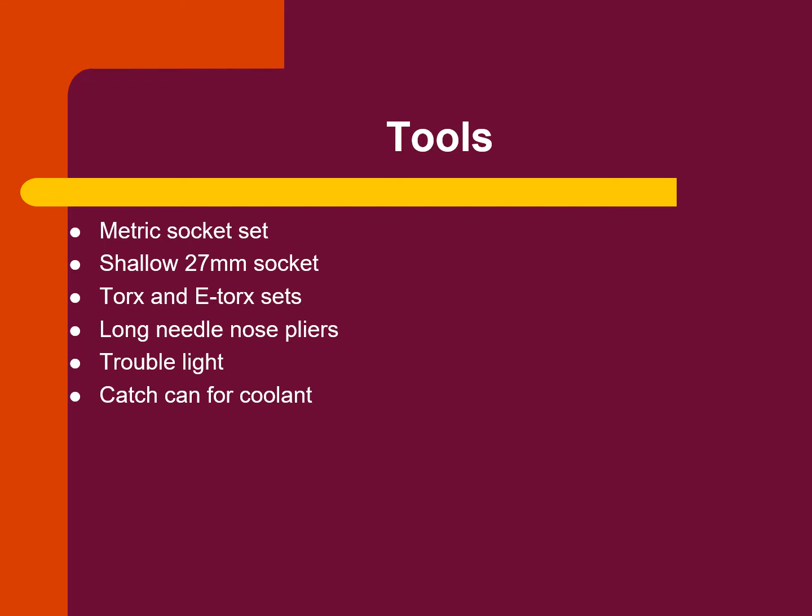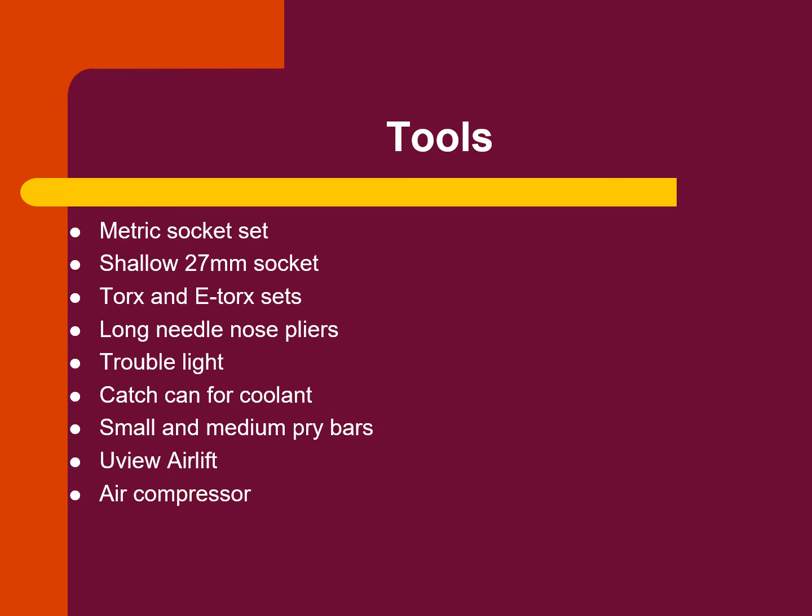In terms of tools, for this project, I used a metric socket set, a shallow 27mm socket for turning over the engine via the crank pulley bolt, Torx and E-Torx socket sets, long needle nose pliers, a trouble light, a catch can for the coolant, and if you happen to have an unused kiddie pool handy, that would be a good idea, small and medium-sized pry bars, a UView Airlift tool, which is for refilling coolant, an air compressor, and an air regulator for use with the UView Airlift,

hose clamp pliers or water pump pliers, torque wrenches, a flathead screwdriver, a 30mm box end wrench, a blowgun, a small punch, and I have a Max Jacks which I use to lift the car, but if you don't have access to a lift, then a jack and jack stands to get the car in the air, and a pipe to use as an extension for leverage when manually turning over the engine.

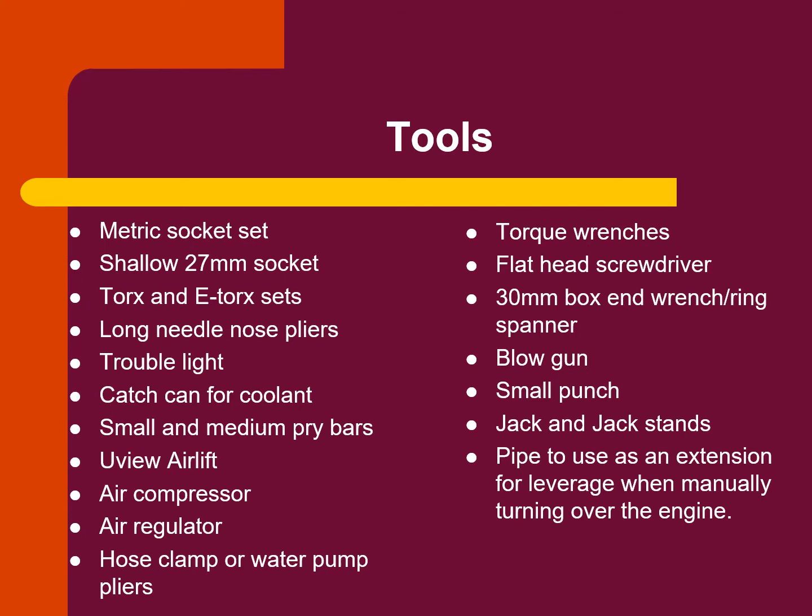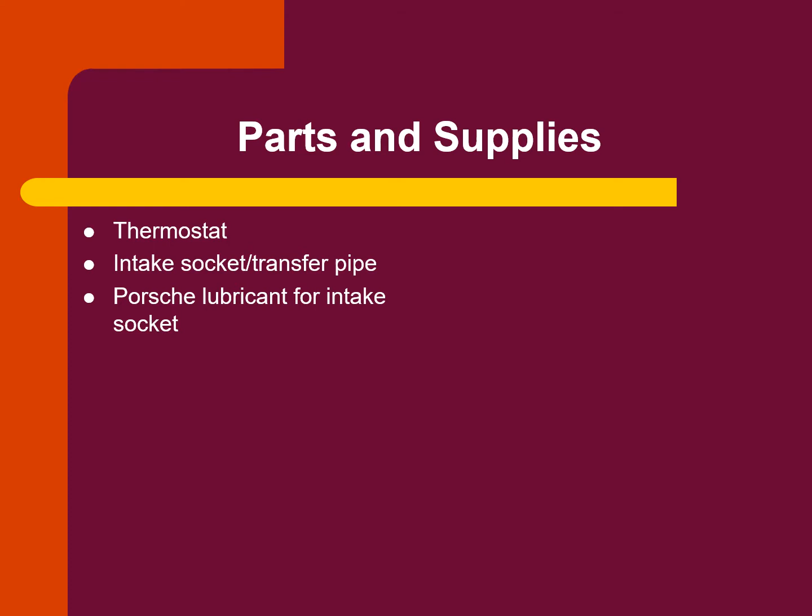I'm going to list parts and supplies that I used for this project, but I'm not going to explain what they were for because that will become apparent as we go through the procedure. So we will need a new thermostat, an intake socket or transfer pipe for the thermostat, and the special Porsche lubricant for that intake socket, 2 gallons of Porsche coolant as well as 2 gallons of distilled water, acetone,

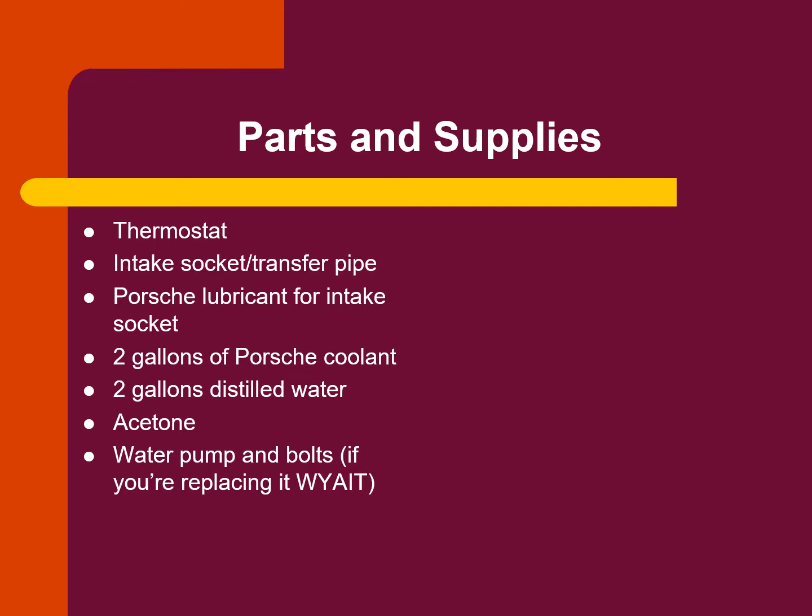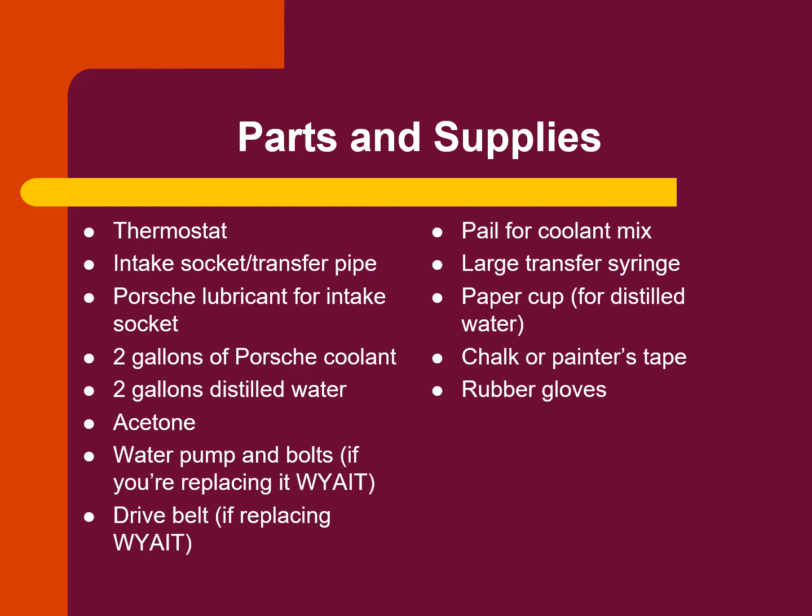a new water pump and bolts if you're replacing it while you're in there, also a new drive belt if you're replacing it at the same time, a pail for mixing the coolant, a large transfer syringe, a paper cup for distilled water, chalk or painter's tape, rubber gloves, a small roughly 4-inch piece of wood, I used a 2x4, and about 2 feet of 12 gauge or similar automotive wire.

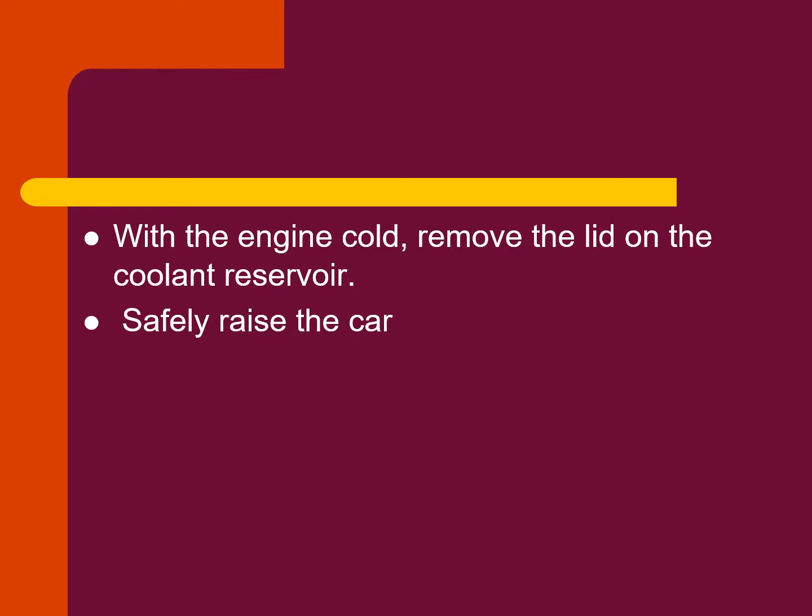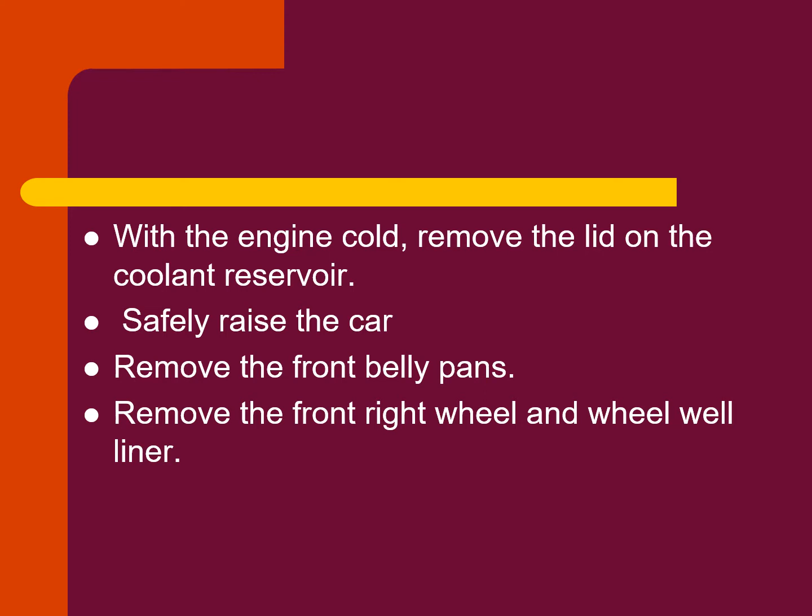To begin, with the engine cold, remove the lid on the coolant reservoir. Then safely raise the car in the air. Remove the front belly pans and remove the front right wheel and wheel well liner. This last step may not be necessary, but I found it helpful. With the wheel off, the wheel well liner out, and the belly pans off, this is the view that you have of the area where you're going to begin working.

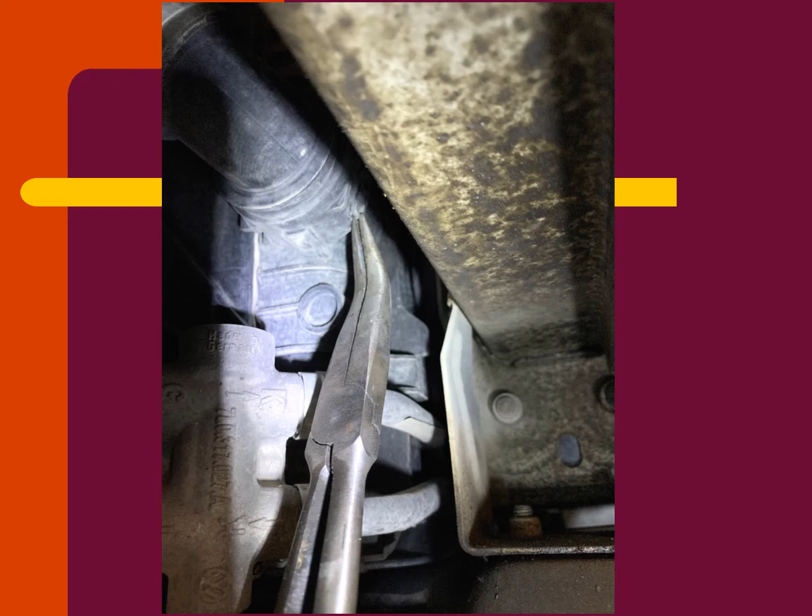At the right front of the car, locate the lower radiator hose and the clip on the hand coupling of the lower radiator hose to the radiator and undo that clip. You simply take, as I have here, some long needle nose pliers and you pull the hand coupling clip away and press up, and that will release, once you've done that on both sides, the clamp from the coupling, and then you can proceed to separate the hose from the radiator.

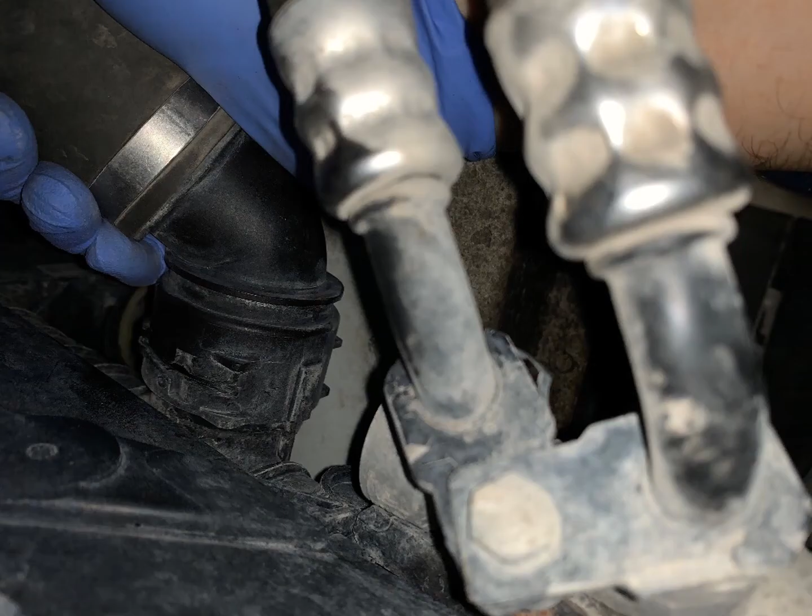Before you separate the hose from the radiator, though, of course you want to have a catch can underneath, and a really suitable one, as I mentioned before, would be a kiddie pool. If you don't have one, well, it's probably going to make a pretty big mess. And that's because when you separate the hose from the radiator, coolant is going to come out of the hose and splash against here and then come back at you and everywhere else, and it's also going to come flying out of here.

And the valence of the car, because of the perspective we're looking at, this is vertical, this is the front of the car, the lower valence is still on the car down here, so when it falls out, it's going to hit the lower valence and then splash every which way. So it is interesting to do this.

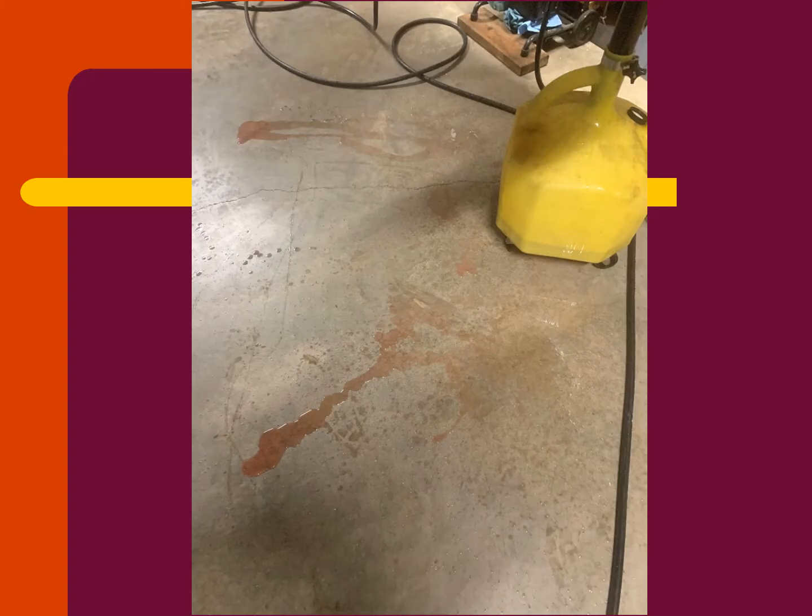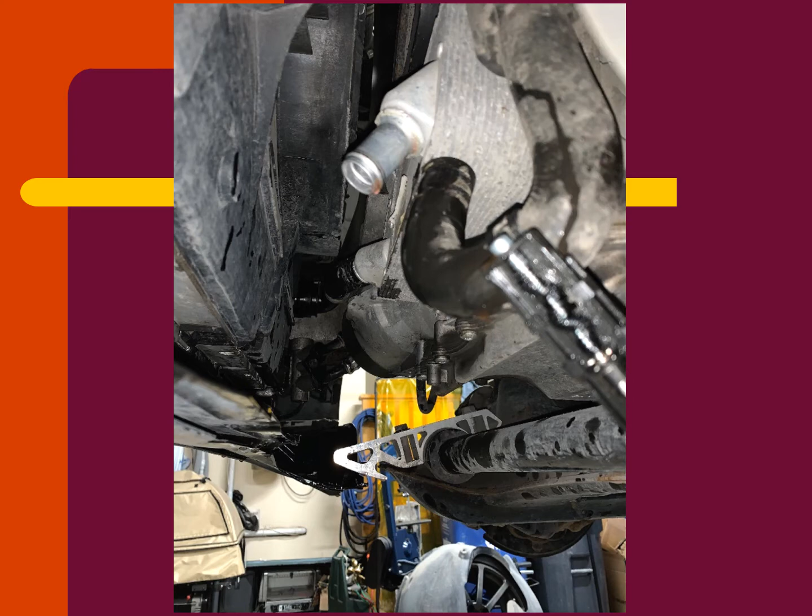And after detaching the hose, this is what my floor looked like. It was worse than it actually looks in this picture. There was quite a bit of coolant on the floor to clean up. Once that location has finished draining, then you can reattach the lower radiator hose and seat the clip on the hand coupling. Next, remove the two coolant hoses on the oil-water heat exchanger.

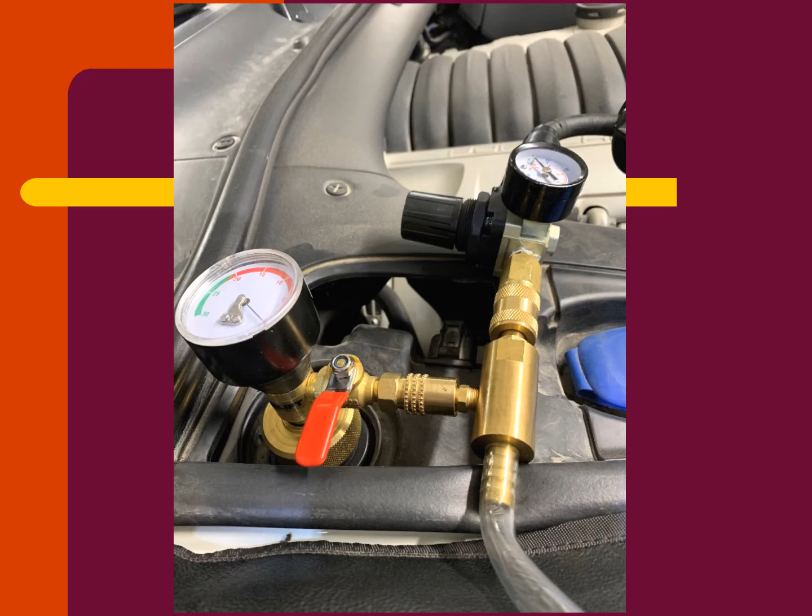Next, what I did was to attach the U-View airlift to the coolant reservoir. The purpose at this point is to use this tool to evacuate the remainder of the coolant from the system. So what I've done is to place my thumb over this line to make pressure, and also use the regulator here, which is set at 7 pounds per square inch because we don't want to put too much pressure through the system, and then open this ball valve to let the air into the system.

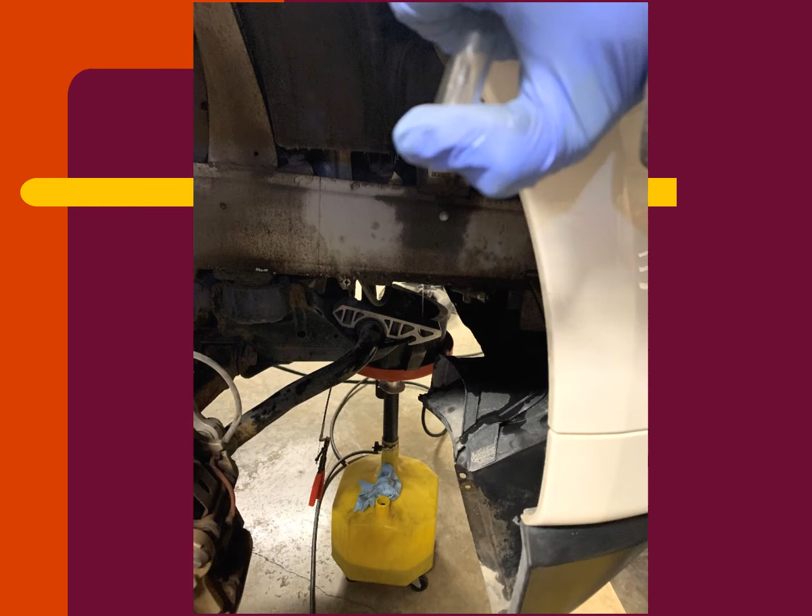And what that does is then blow out the remainder of the coolant through the system out where the oil water heat exchangers are still open underneath. So here you can see that I have my thumb covering over the tube from the U-View airlift, and if you look really hard you can see that there is coolant coming out from the oil water heat exchanger.

So once there was no more coolant coming out from those openings, then you can reinstall the hoses to the oil water heat exchanger, reinstall the wheel well liner, reinstall the right front wheel, and don't forget, once you have the vehicle lowered after you've done the job, to torque those lug bolts to 110 foot-pounds, and then we can move on to the next step.

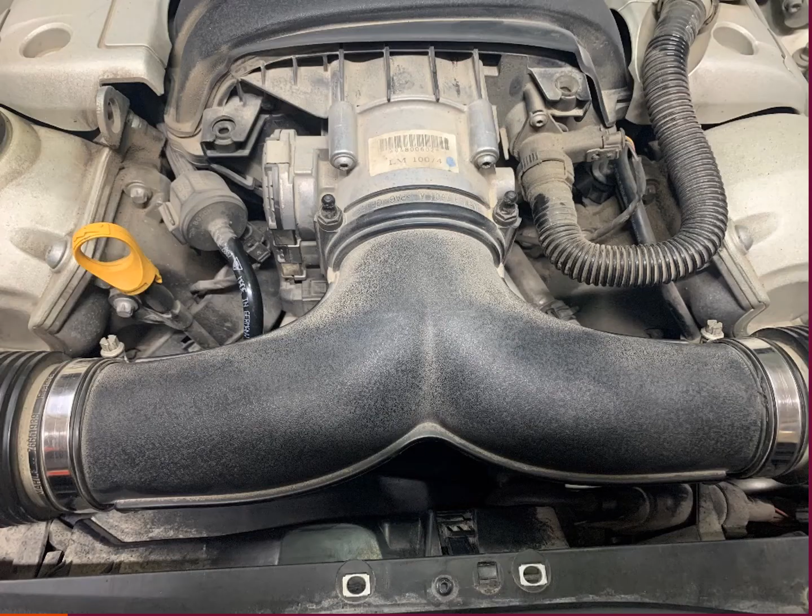And the next step is to remove the air intake tubes and Y pipe. And you begin by removing the engine cover that sits here. It simply pulls off these two rubber grommets just by lifting straight up. Then there are 6 plastic bolts, for lack of a better word. You can see 2 in this picture. These ones have hexes on them. I just use the needle nose pliers to gently turn them.

There are tangs on the very bottom of each that line up with this channel. And once the tangs line up with the channel, then you can simply take the pliers, attach here, and pull straight up, and they'll come out, which then releases the Y pipe from the throttle body. And then on both sides there are similar pins, 2 on each side. These have a Torx fitting that you again turn to line it up with the channel and then pull it straight out. Before doing that though, don't forget to disconnect the electrical connectors. There's 1 on each side.

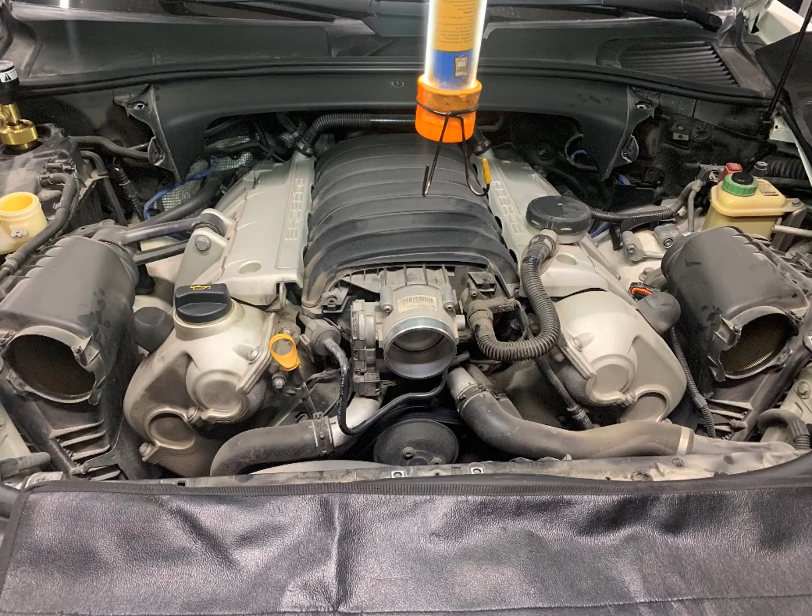So once you've done that, this is the space that you have to work with. It's not too bad actually. Next, you remove the engine bay design covers from both sides, and you're left with a small pile of parts on the floor that looks like this.

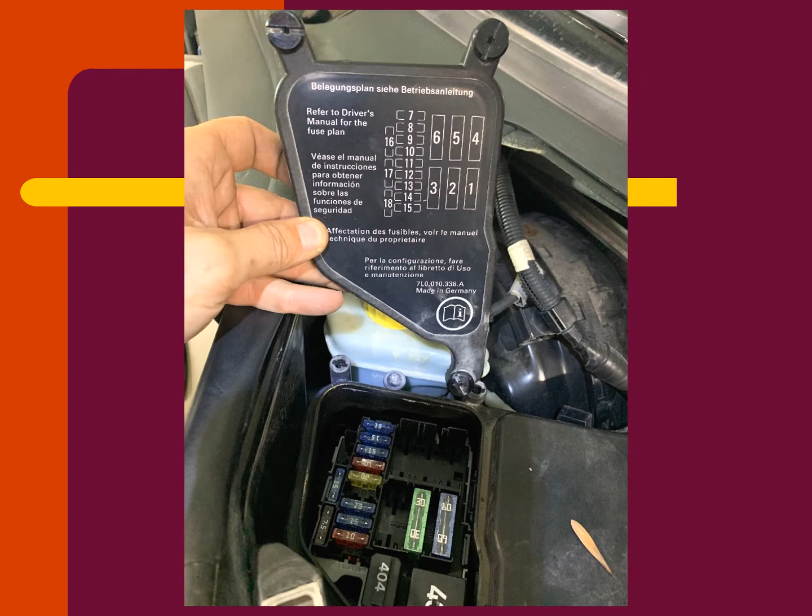The next thing I did was to remove any fuses that I thought could give power to components that could fire the engine. So I opened the engine compartment fuse box and located the fuse for the high pressure fuel injector, which was fuse 11, the right fuel pump, which is fuse 13, the left fuel pump, which is fuse 14, and the electronic control unit main relay, which was fuse 15. So remove those.

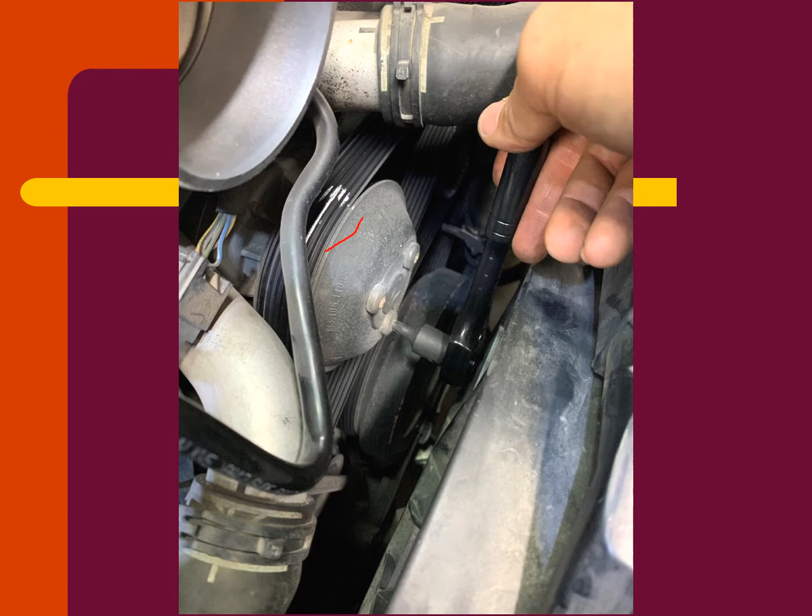Next, what I did was to use some chalk to draw an arrow on the belt showing the direction of travel. Even though I was changing the belt with a brand new belt, I wanted to keep this one as a spare, and so if I ever do have to put it on, it should be replaced in the same orientation as it was before. So that's why you add the chalk line. You could also use painter's tape with a marker line, but I was a little concerned that the painter's tape would eventually stop sticking, so I thought chalk would be the better way to go.

So what you do then is use a T40 socket to loosen the bolts on the water pump pulley. So that's what's happening here. And you do that at this point because you still have the belt on, and the belt naturally counter holds against the action of undoing the bolts in the pulley.

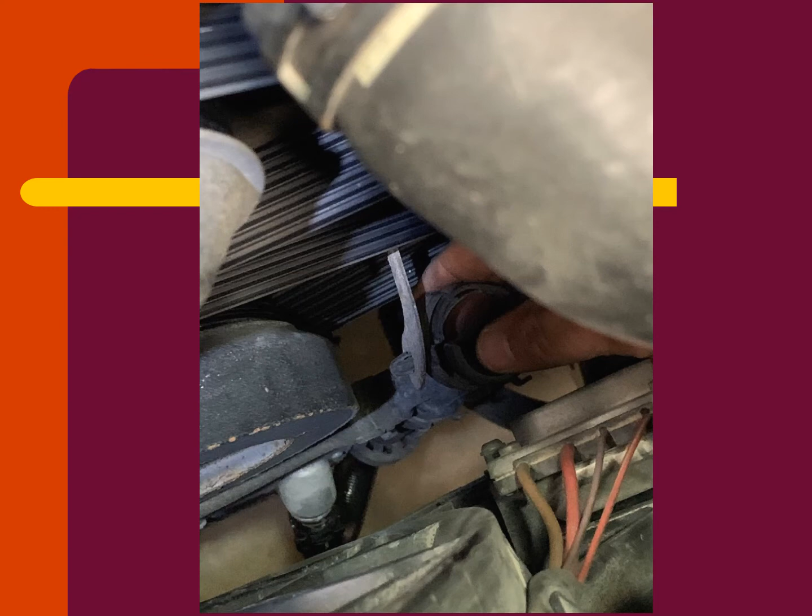The coolant connecting clip needs to be removed. So first of all, you have to take the coolant hose out of the clip, which is there. And then I took the long needle nose pliers, and there's kind of a Christmas tree type connector here going through a bracket. You just pinch on both ends to push these tangs here inward, and then push the clip out of the bracket, and it comes right out, no problem.

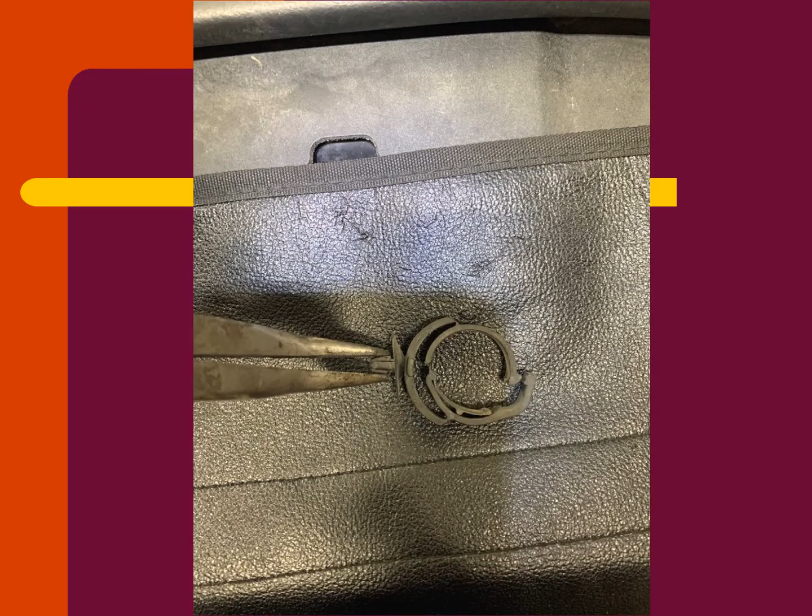Here's a visual of the coolant connecting clip once removed, and you can see I'm pressing on the clip with the pliers, showing you how to get it out.

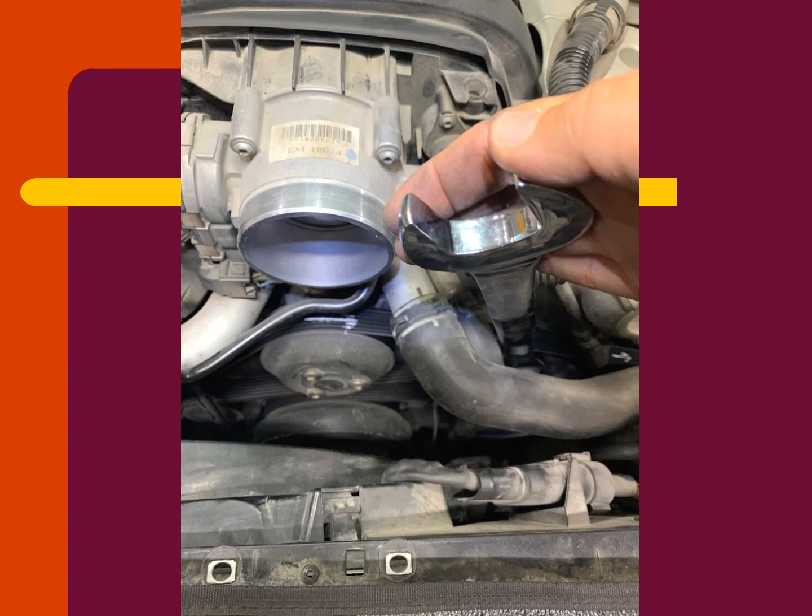Before removing the drive belt, ensure that you make a diagram of the routing of the belt. So you need to know exactly how it's supposed to be routed when you reinstall it. So draw yourself a little diagram of that.

Then use a 30mm box end wrench to turn the tensioner hexagon, which unfortunately you can't see in the picture, but the wrench is on it in this picture, and you turn it clockwise. So you pull in a clockwise direction, and that relieves tension on the belt so that it can be slipped off of one of the pulleys. You can take your pick of what's within reach, and then you gently allow the tensioner hexagon to go back to its resting place.

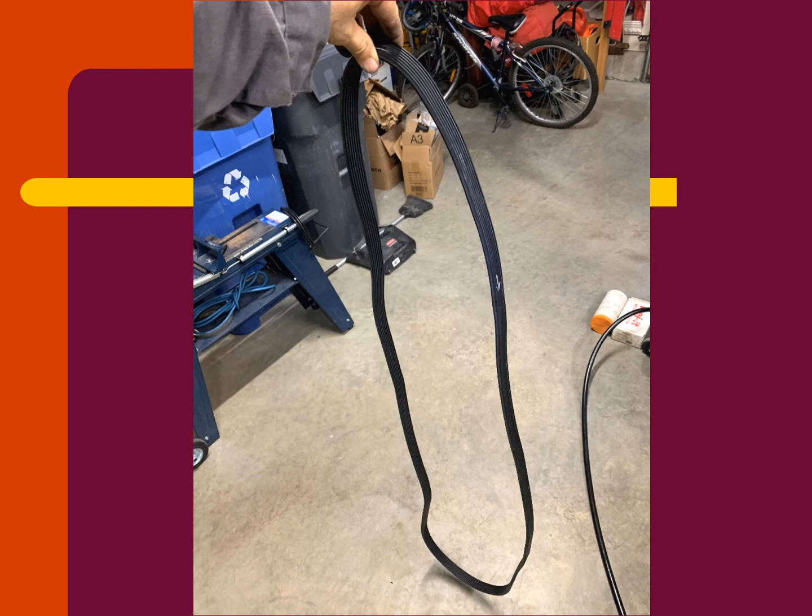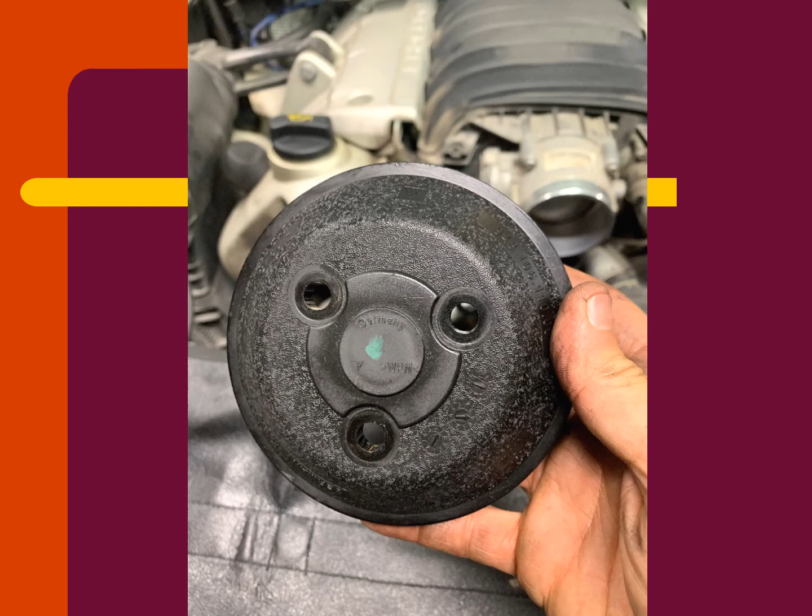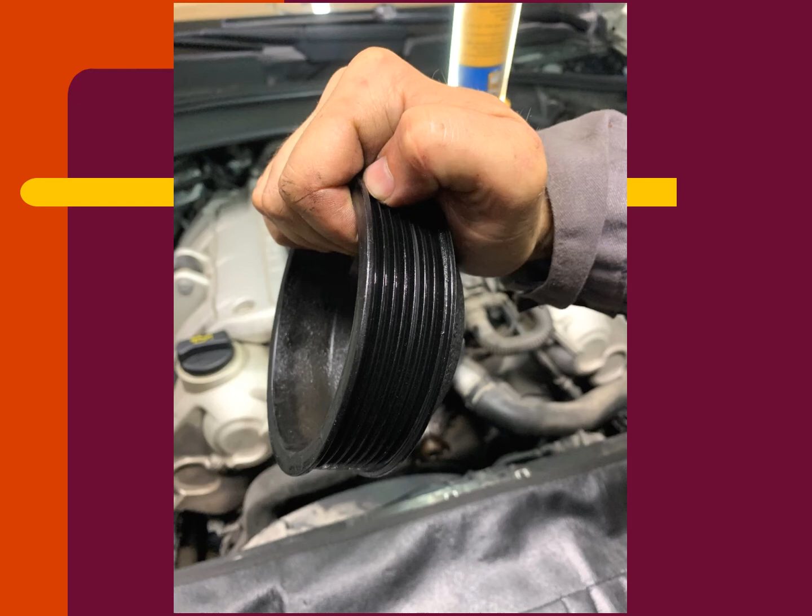Then fish out the belt from the engine compartment, and it's a surprisingly long belt. Having loosened the bolts while the belt was still attached, now you unscrew the bolts and remove the water pump pulley. Mine was kind of stuck on, and it's a plastic pulley, so you shouldn't hit it with a hammer or anything, but what I found worked for me was to put my hand the way I'm showing here, sort of cupped, and kind of wiggle that way around in various places to get it started, and then it came off quite easily after doing that.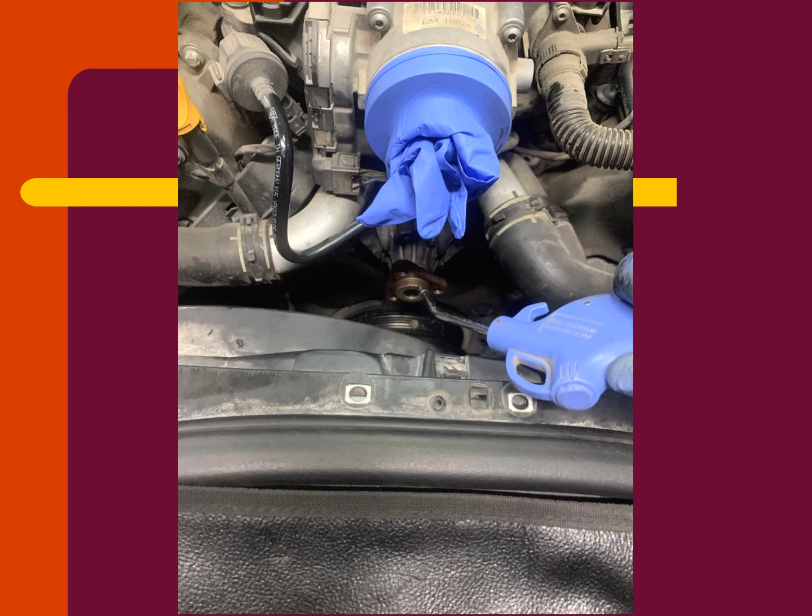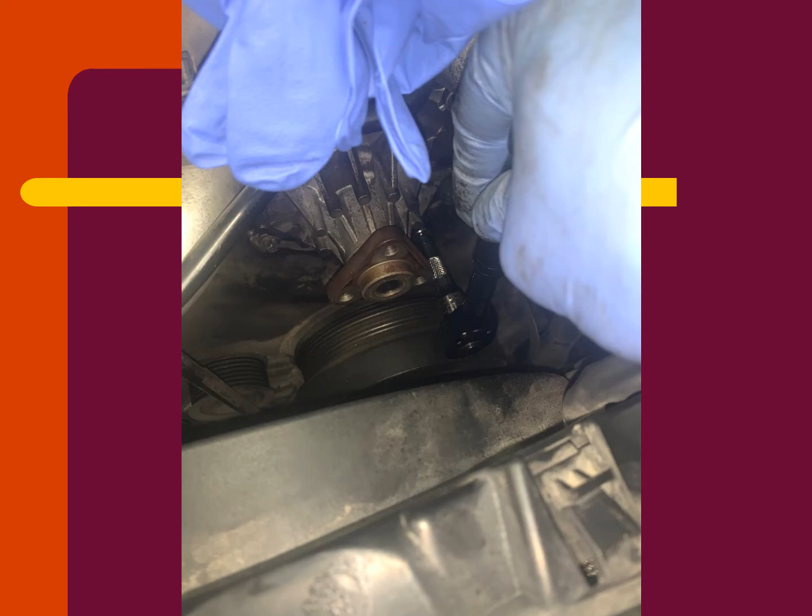Next, I covered the throttle body with one of my nitrile gloves to keep dirt from getting in, and then I used compressed air and a blowgun to sort of blow dirt away from the water pump prior to removing it. The water pump is held on with 5 bolts. There are other bolts in the block of the same size, so you need to be careful to identify the correct bolts for removal. The 2 on the bottom are difficult to see, and bolts that are on the block could easily be mistaken for those 2 bolts.

And you'll see in pictures that I'll be showing later on where the holes are in the block after the water pump is removed, as well as the holes in the uninstalled water pump. So this will become more clear in a bit. So using an E10 with a short extension, remove the 5 bolts that hold the water pump in place. My water pump then simply pulled off, but if yours is stuck, what you could do is use a dead blow hammer to gently tap on the pump to loosen it.

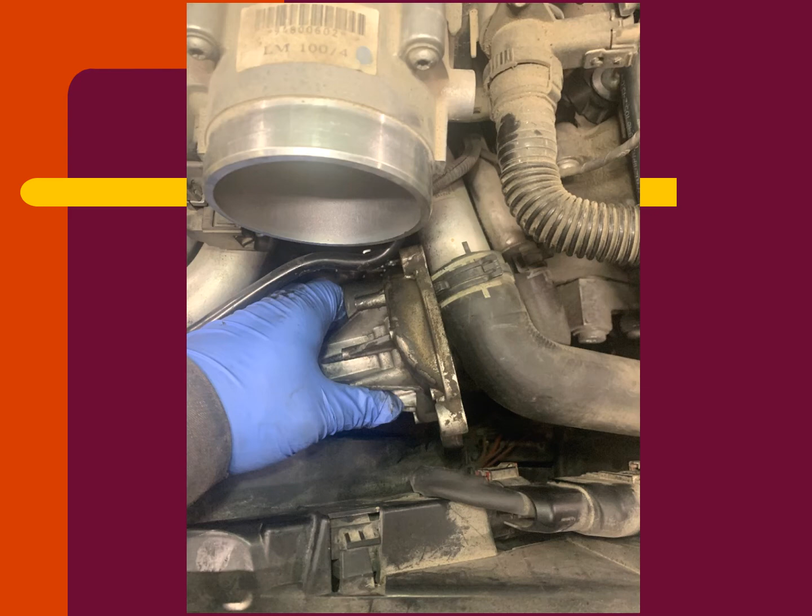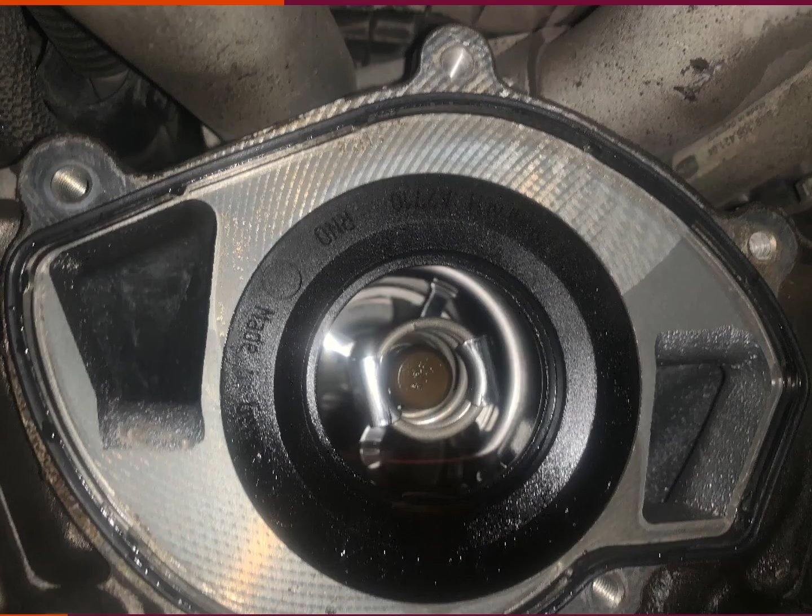Upon removal, a little bit of coolant came out from behind the water pump, but really not very much at all. And it's a bit difficult to remove the water pump, but it can be fished out as per the pic that you can see here. The water pump seal stayed in the block, so obviously that needs to be removed.

And then we can see nicely in this picture the intake socket or transfer pipe, how it sits in front of the thermostat here, the thermostat inside, and how the intake socket makes a really good seal with the block. But this intake socket is quite stuck in place. To remove it, I looped some 12-gauge automotive wire around the first 2 winds of the spring on the thermostat.

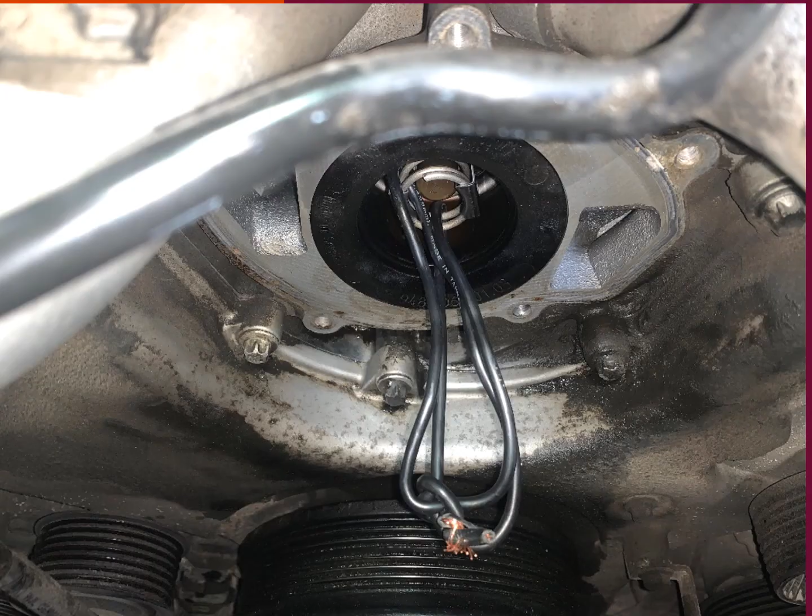So here we can see the automotive wire wrapped around the springs of the thermostat. Note that one loop is on one side of the steel bracket holding the spring, and the other loop is on the other side of the other steel bracket holding in the spring. It's a little difficult to see in this picture, but I'll have a better picture for you once it's removed that illustrates exactly how this was done.

This was done in an attempt to ensure even pressure against the steel bracket to minimize the chances that the spring would pull past the bracket. If that were to happen, it would be very difficult to remove the thermostat and the intake pipe. So one needs to undertake this part of the job very cautiously.

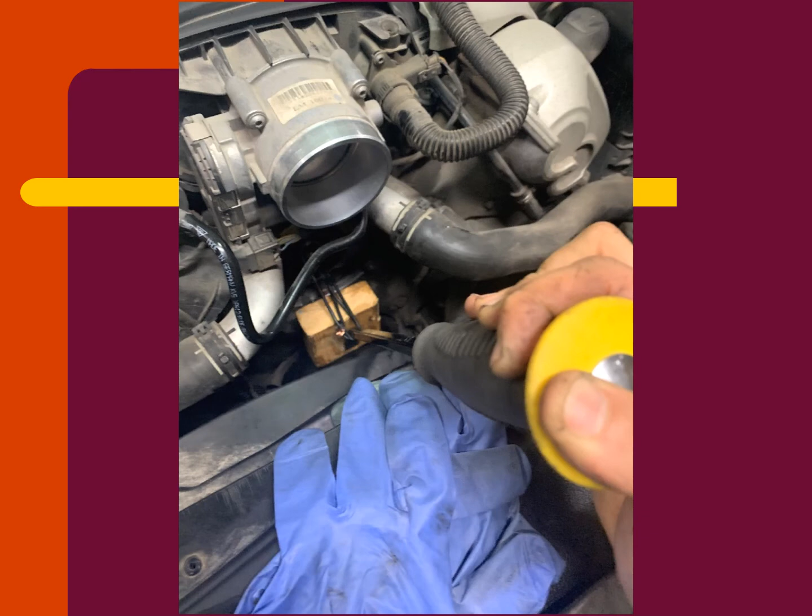Once you've wound the automotive wire around the spring on both sides of the bracket, then you tie it in a knot out front to allow you to pull from that location. Next, I placed a small piece of 2x4 against the block so I wouldn't damage the block with my pry bar, and then gently pried against it to pull out the thermostat. And this worked very well. It was in there quite well, but it also came out relatively smoothly.

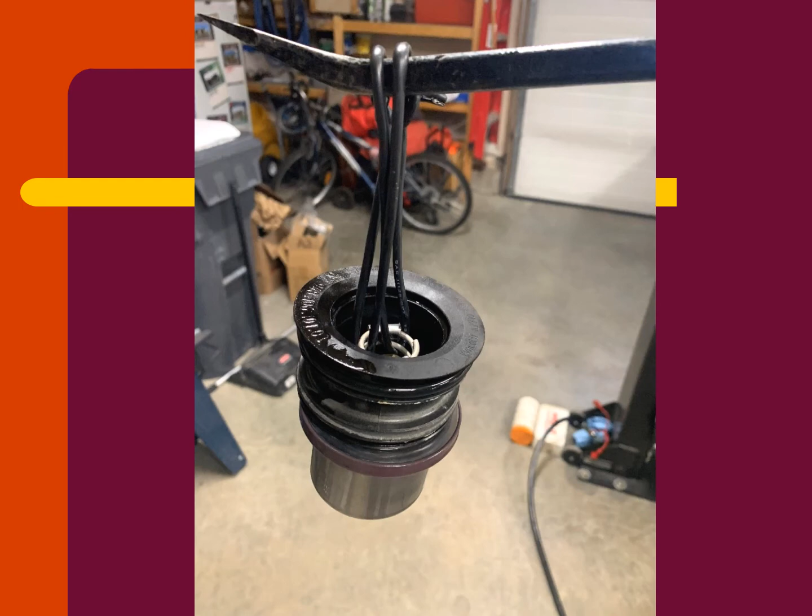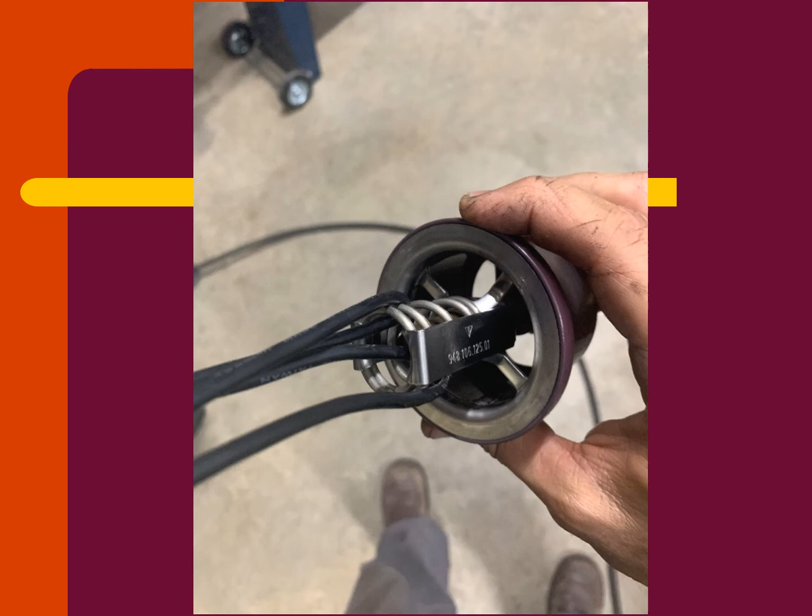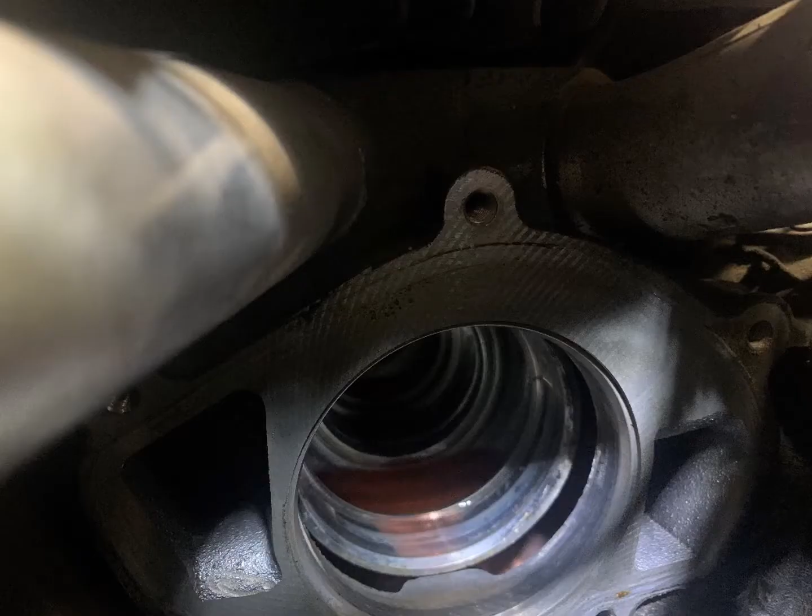So here's a picture of how the intake pipe and thermostat looked upon removal. And in this picture you can see more clearly how I had attached the 12 gauge automotive wire on either side of these steel brackets here. So one's on one side, the other's on the other side, which helps to ensure, as I said before, even pressure when pulling it out. So upon removal of the thermostat, some additional coolant did come out from behind the thermostat, but it was really very little.

There are two holes that you can see here, where it's really one large hole, but it kind of looks like two holes in the thermostat housing that allow the coolant that was sitting behind the thermostat to fall into the valley of the engine. And I think that's the main reason why some people remove the intake when changing the thermostat on this generation of the Cayenne. And that is so that they can clean up the coolant out of the valley so that you don't smell the coolant boiling off.

The problem with removing the intake is there are very brittle plastic vacuum tubes, etc., that have to be manipulated, and that can create all kinds of other problems. So that's why I did this procedure without removing the intake, to try to avoid any of those sorts of issues. And that's also why I used the UView Airlift to push air through the system to try to evacuate as much of the coolant as possible, because I didn't want it falling into the system here and sitting in the valley.

But to further mitigate the little bit of coolant that did fall into there, I took a cup with some distilled water and just poured it into these holes. So it was maybe half a cup of water or so, just to dilute that coolant further. Another thing you can do is, if you live in a hilly area, once you get the car reassembled and take it for a drive, just point the front end down a hill and hit the brakes pretty hard, and apparently that will also slosh out any remaining coolant that's sitting in the valley.

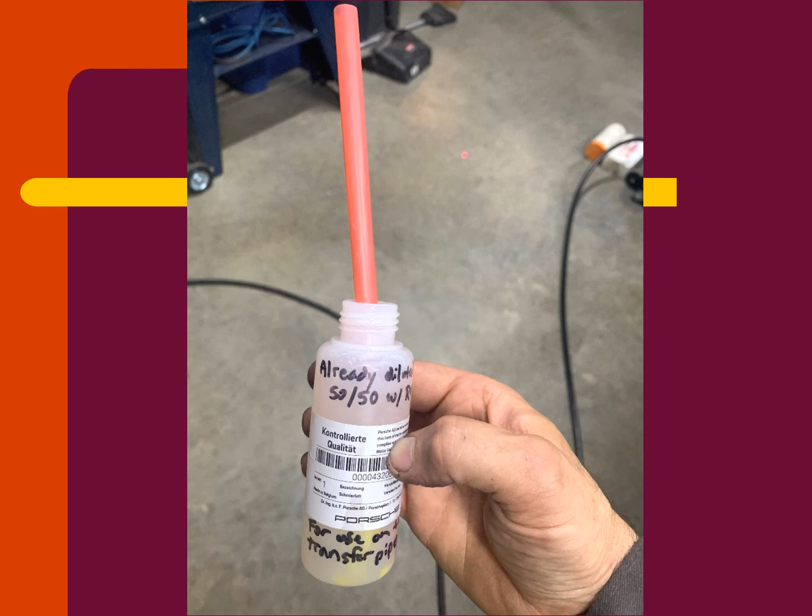The O-rings on the transfer pipe require a special Porsche lubricant to be applied prior to their installation, and this lubricant is diluted 50-50 with distilled water. Then it should be stirred and then applied to the O-rings. So I dumped out half of the container into another container, poured in the distilled water, and then used a straw to mix it up as shown here.

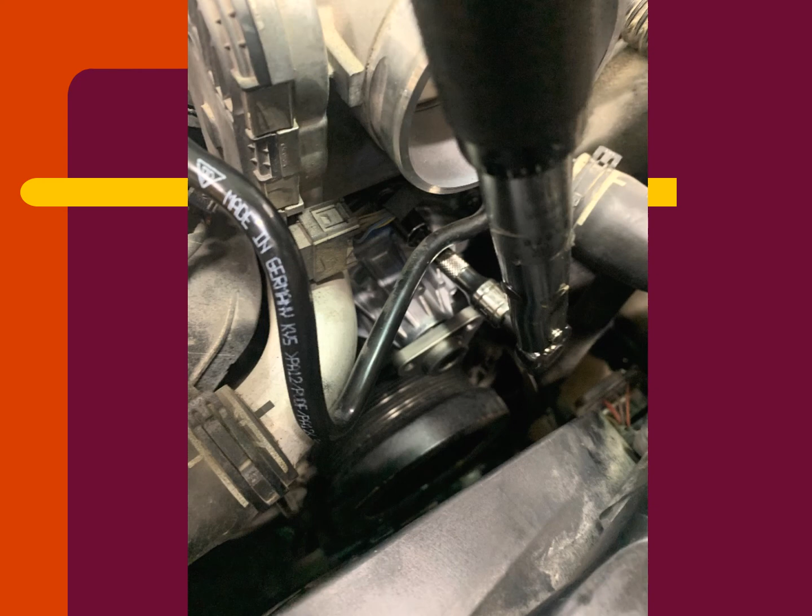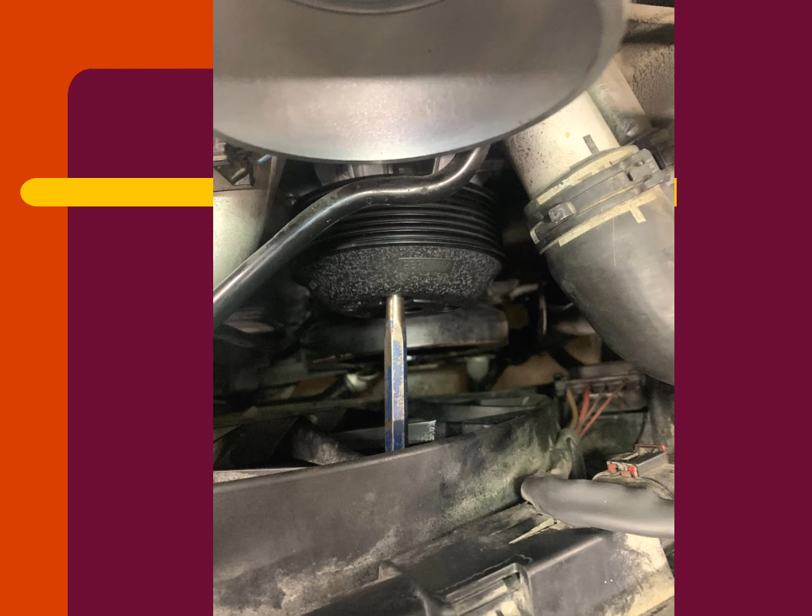Next, using acetone, clean the mating surface of the block and the mating surface on the water pump itself. With the gasket installed in the water pump, my new water pump came with the gasket pre-installed, install the water pump and finger tighten the 5 bolts. Starting with the top bolt and working in a clockwise fashion, tighten the bolts to 7.5 foot-pounds or 90 inch-pounds. Next, install the water pump pulley to the water pump, and I used a thin punch to help me line up the holes in the pulley with the holes in the water pump.

I didn't torque the bolts for the water pump pulley until after the drive belt was installed because I wanted to use the engine to counterhold the pulley just as I did when I was loosening the water pump bolts. However, the pulley would spin before I could get the correct torque on the bolts. So at this stage, if you have an appropriate method of counterholding the pulley, for example, a rubber strap wrench or something, you can torque it to 17 foot-pounds.

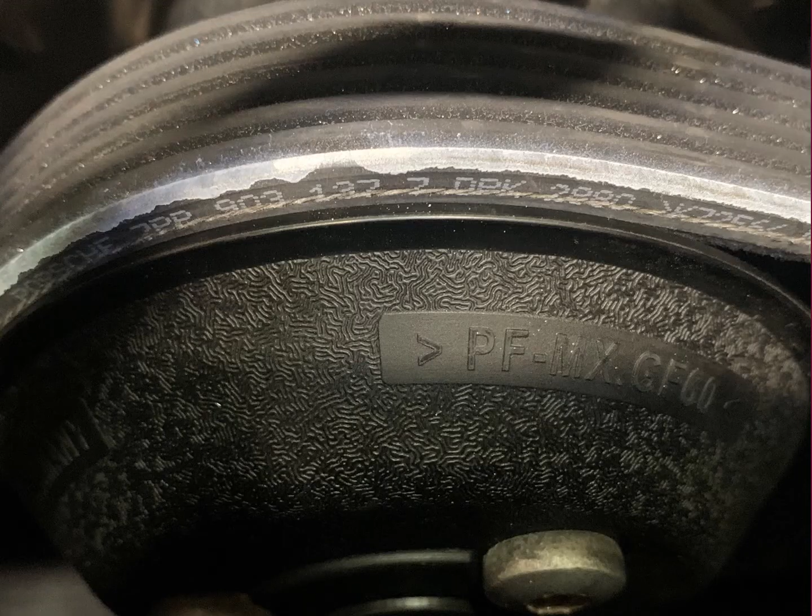The next thing you do is install the drive belt and begin by placing it behind the dipstick tube as shown in the picture. I placed the belt on the water pump pulley such that I could read the small text on the belt as shown here. At this point I tightened the water pump pulley bolts, and while the torque didn't quite reach 17 foot-pounds, my sense was that they were on quite tight.

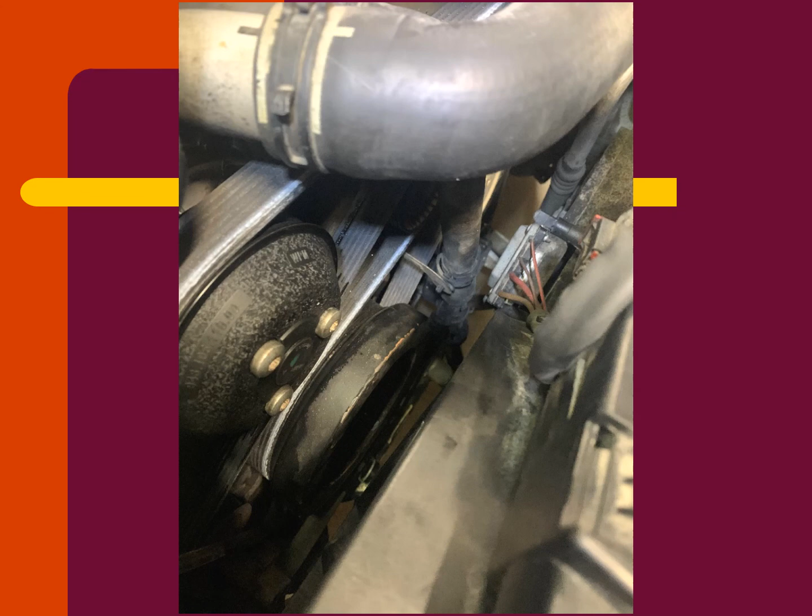Then you reinstall the coolant hose connecting clip into its bracket and place the coolant hose into the clip. Check that the drive belt is correctly positioned on all pulleys and use your diagram to make sure that you have it routed correctly.

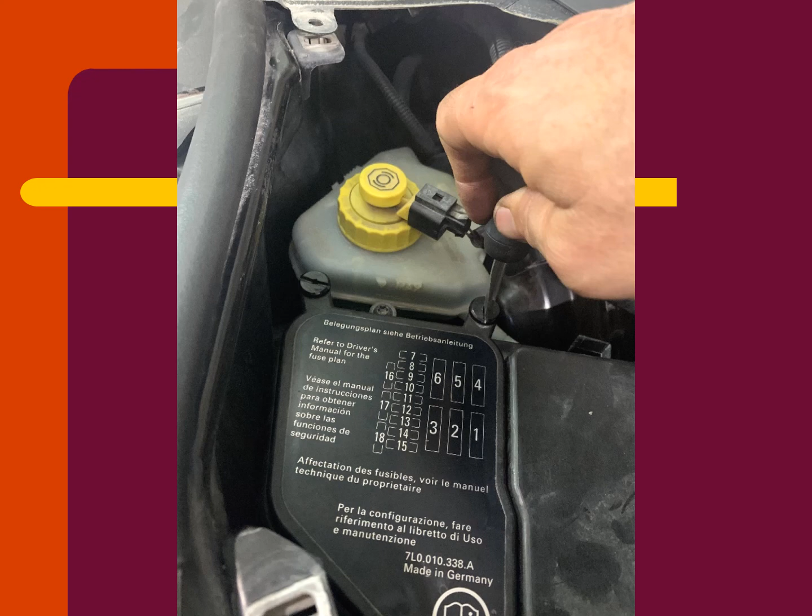And then using a shallow 27mm socket on the crankshaft bolt with a piece of pipe over the ratchet for leverage, turn the engine over, remember only in a clockwise direction, and observe that the drive belt is tracking correctly on all pulleys. Next, reinstall the fuses and the fuse cover. Then reinstall the Y-pipe for the throttle body and the air tubes.

Now what you do is prepare your 50-50 mix of Porsche coolant and distilled water. My car took 10 liters of mix, and the UView Airlift system requires some extra in your container to ensure that no air is drawn into the system, so I ended up mixing about, I think, 13 liters. The instructions for the UView Airlift are straightforward, and so I won't repeat them here, but basically what you do is you attach your compressed air line and pull a vacuum on the system.

Once the vacuum reaches 24 to 26, I think it's inches mercury, you close the ball valve and watch over at least 20 seconds to see if the vacuum falls. If it does fall, it means that there's a leak in the system. It's great to know that there's no leak prior to filling with the very expensive Porsche coolant. If there is a leak, obviously it needs to be identified and fixed prior to moving on to the next step of filling up the coolant.

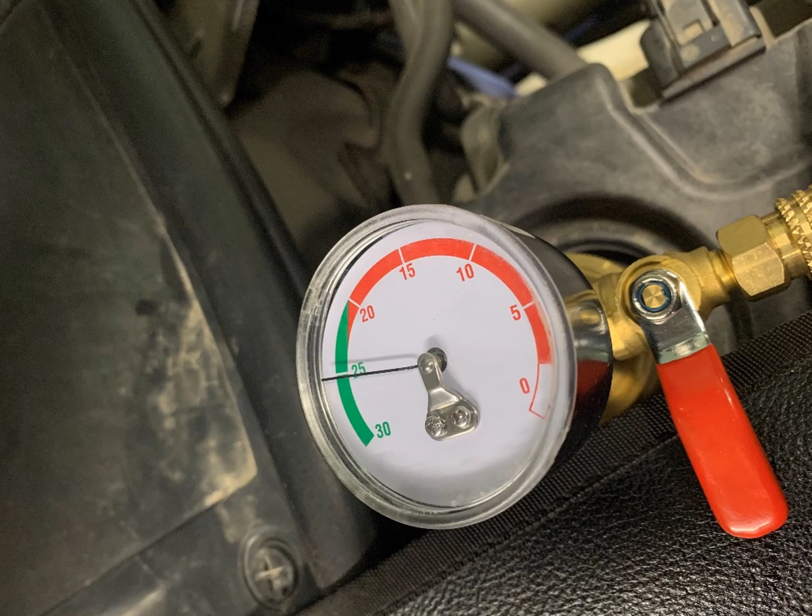To facilitate refilling, the coolant container should be about the same height as the coolant reservoir. My garbage can turned out to be the perfect height for the Cayenne. The 5-gallon pail worked very well because it easily allows submersing the line to completely fill the line so that no air enters into the system prior to attaching the line to the unit at the coolant reservoir.

Once the gauge on the UView Airlift reaches 0, the system is full, so you simply remove the Airlift and then check the coolant level in the reservoir. Mine looked like it might have a bit extra coolant in it, so I used a transfer syringe to remove the excess.

Then what you do is you check for any visible signs of leaking. If you don't see any, then you turn the heat to high and start the car, and then check again for leaks after the car's been running for a bit. Then you let the engine cool, and once it's cold, you open the coolant reservoir and check the level again and top up as necessary.

Then reinstall all the covers for the engine compartment, reinstall the front belly pans, lower the car to the ground. Don't forget to retorque that wheel to 110 foot-pounds if you did take off the front right wheel. And then take the car for a drive, paying attention to the engine temperature.

And following your drive, and after the engine has completely cooled off, then check the engine coolant reservoir and top up as necessary. And then just for the drives that you take for the next few times, keep an eye on the coolant level afterward and on the coolant temperature during the drive to make sure that everything's good.